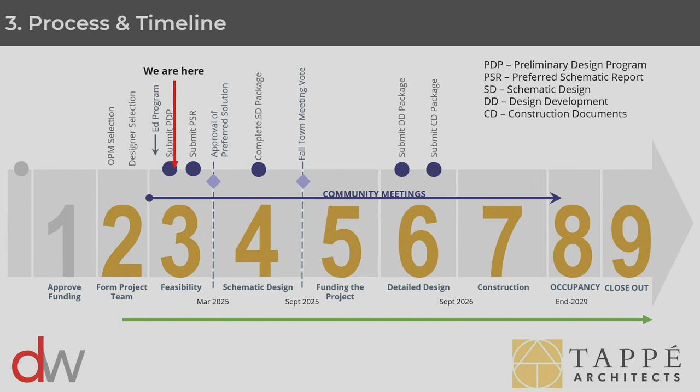And then from there, we came up with 15 distinct options. Some of those options include an outright renovation of this entire space, addition renovations where we get rid of some of the building and add new sections, and outright new buildings. And so that's what we've been doing over the course of the last 8 months.

And then, Chris, if you could just go to the next one. You'll see on this, I'm really focusing on the next 9 months as to what we're doing. You'll see terms up here that if you were watching Fox Hill, we have just completed the preliminary design program. That's how we then narrowed down those 15 options down to 5, which is where we're going to spend, I think, a fair bit of time later in this presentation.

And we've moved into something called the preferred schematic report, where over the course of the next 3 to 4 months, the design team working with ourselves and the school building committee is going to narrow those options down to one preferred schematic, one preferred design. From there, we will develop a schematic design. That will go to estimators, so that we actually have a firm cost as to what that will be.

That ultimately is the tool and the output that we will bring to the school building committee, and then ultimately bring to the town. And we are hopeful that between now and the fall of next year that we can have a package to put to the town so that people can consider that high school solution.

And so that's sort of where we are, and I'm actually going to stop talking for a little bit and introduce you to Chris. We do have a short video that, if you haven't seen, I think is useful in terms of understanding the existing conditions and the educational visioning. And then I'm going to ask a question after we watch the video.

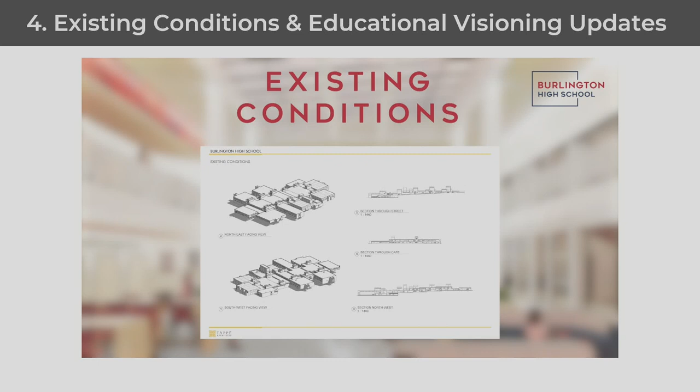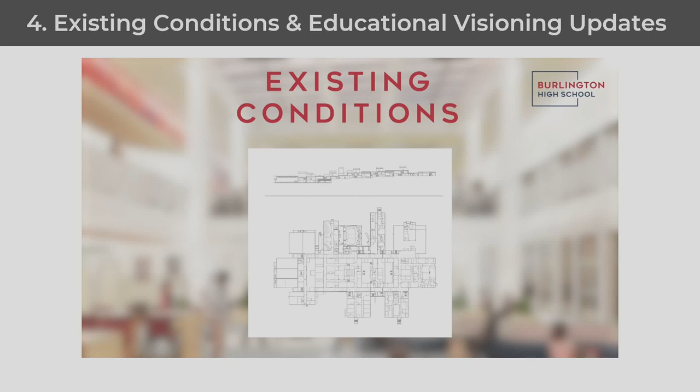Tappé Architects and their consulting team have documented a detailed existing conditions plan of the building. By determining the state of the space and the building elements, it can be determined what is working and what needs to be adjusted or replaced to meet the educational goals, as well as provide a safe and healthy learning environment. Burlington High School was constructed in 1971, 53 years ago.

The cast concrete construction shows expected wear for its age. From a structural standpoint, there are no major deficiencies, but any addition or renovation to the building would need to meet updated structural codes dependent on the determined project scope.

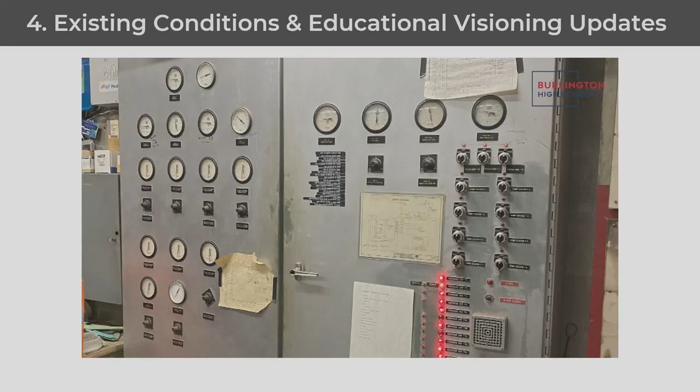The existing electrical system appears to be original to the building and is far past its recommended replacement age. It will need to be fully replaced. Additionally, there are deficiencies with the emergency power and fire alarm systems, which will require replacement. Existing lighting is retrofitted and should also be replaced. The building is not fully sprinklered, and a fire suppression system will need to be installed in combustible areas.

The HVAC system is natural gas, mostly original to the 1971 construction, and is in various states of disrepair. The science classroom exhaust and air systems have failed and are no longer functioning. Controls have degraded over time. They are not maintainable due to unavailable replacement parts. They have many air leaks and have left the building with little to no control in most areas.

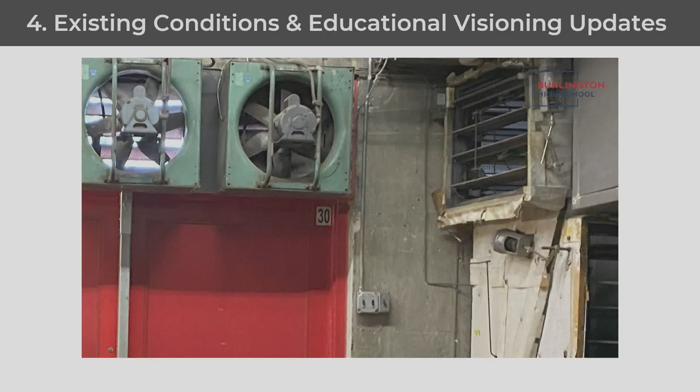The building's plumbing shows several key deficiencies in areas that do not meet modern code requirements. Updating the water system would also improve accessibility and conservation standards.

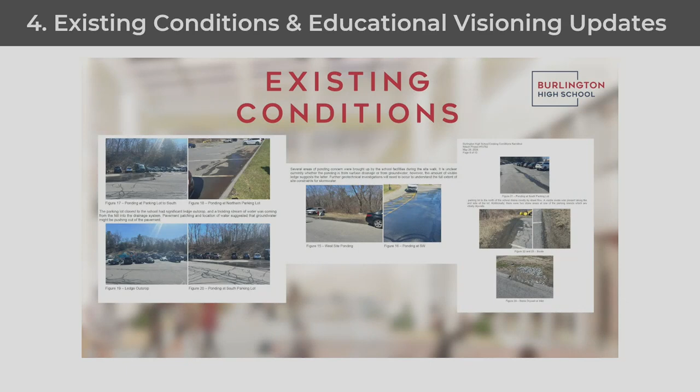Civil engineering has identified several areas of concern. The current stormwater management system does not appear to adequately mitigate large rainfall events. This will require upgrades to meet modern state standards to mitigate and treat stormwater as it flows to adjacent wetlands. For parking and sidewalk considerations, the existing driveway is in poor condition and parking spaces and lanes are oversized, resulting in less parking spots than required.

A building project will need to meet current accessibility requirements for pedestrian routes, including ramps, handrails, and parking. Due to the extreme slope on the site, there are several outdoor areas that are not properly accessible. The fields and stadium are in good condition, however, there are drainage issues on the practice field.

There are several instances of asbestos, lead, PCB, and mercury discovered in the expected areas of a building of this vintage. While they do not pose an immediate threat if undisturbed, any renovation or removal of the materials would require appropriate remediation.

The IT, technology, and security systems of Burlington High School are in various states of adequacy. In general, they are undersized for an expansive building and site like Burlington High School. Any building project would need to incorporate a more robust security and access control plan and delivery, as well as provide technology suitable for 21st century education.

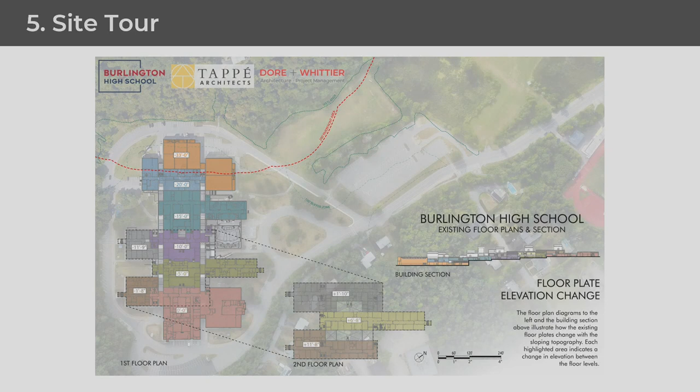When you hear us talk about an off-site building available that we became aware of, it's across Cambridge Street - 10 Corporate Drive. That's the address, but as the crow flies, it's not far from the high school building itself, though it is a building that's vacant. So when we talk about these options, that gives you a little bit of orientation. If anybody's confused along the way, just raise your hand and I'll try to help orient you to where we're at.

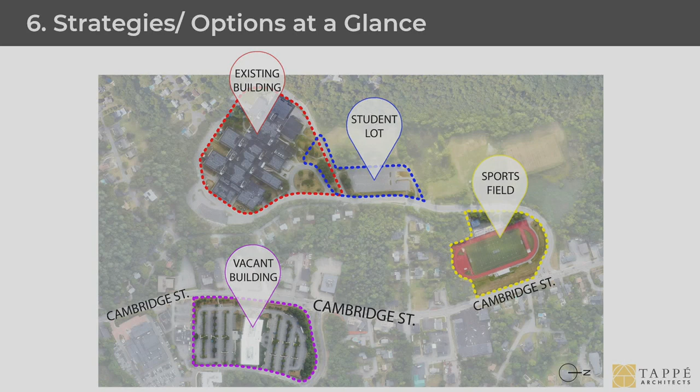So we started the project out by - the building is quite large. It's like 370,000 square feet, and that's a lot of square footage. The program we are building to is 1,100 students, which if you translate that out in the space summary results in around 222,000 square feet needed for just a high school program.

So the building is oversized, and you know that because you already have non-high school education spaces in this building right now. So you'll hear us reference those sometimes in these options - things like BCAT and the lab initiatives, Cambridge Street Closet, the preschool program, central administration. All of that stuff's in this building, co-located with the high school, and that's what makes up the rest of the square footage.

But the building's large, and instead of diving right into bricks and mortar, or architecture so to speak, and program, we wanted to think about the building in terms of strategies. Because we had this building with 8 first floors, 3 second floors, and really, how do you break that down and understand it from a kit of parts - what you can take apart at each step to get to a result that you needed. And so we developed these strategies.

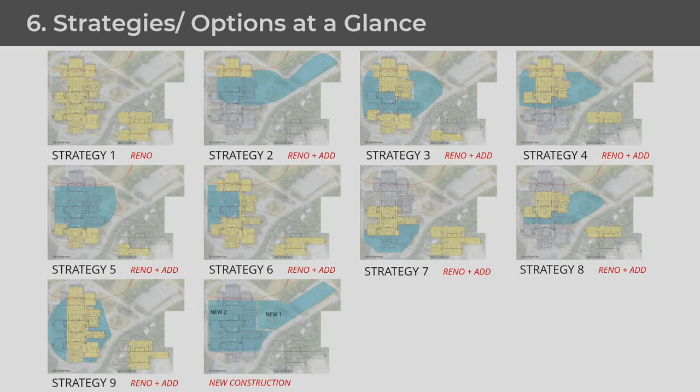The stability factor, this space was built on wetlands, is that correct? There are a lot of wetlands, but you're on ledge as well. So most of this building actually is probably supported on ledge. And you can blast down on this ledge, sure, and not cause any trouble to the homes surrounding the space? No. And it may not be blasting, it may be chipping. There's all kinds of construction methods. Usually when we have a project that's intensive on that kind of work, it's embedded in the contractor's scope, like they'll do surveys around buildings that are really close by with video inspection and stuff, so that if some vibration of the earth does cause cracks in their house, we have a before and an after so we can know what caused what. But contractors don't want that to happen, so they take all the management risks to avoid it.

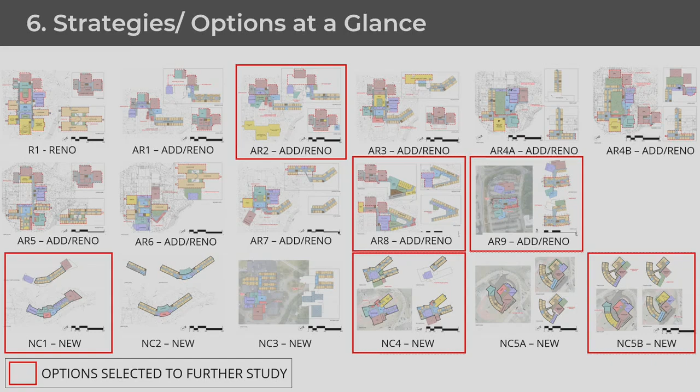I'll talk to you quickly about those relative to the orientation site plan I showed you before, where everybody's got that little loop road going around the existing school to orient you. These site plans identify things in a way that's a bit easier to look at than the program elements shown in the options before. They're kind of a thumbnail view, zoomed out. You don't really get what the program is inside, but it helps you understand what's happening with this option, and then we dive into the specifics as it goes forward.

AR2 is a project looking at an addition going basically into the drop-off circle right now. The strategy is you can build classrooms first, then move the kids into them, and then start to take down other parts. So it creates swing space that's actually permanent, which is a good goal to have, because you can spend millions of dollars on portable temporary school facilities that just get shipped away at the end of the project. So one strategy is to build the new stuff and let that be your swing space, allowing you to move around in phases.

Sorry? Yeah, we would revise the drop-off spot, you can see in AR2. We don't have a laser pointer, do we? No. I think I could do it here.

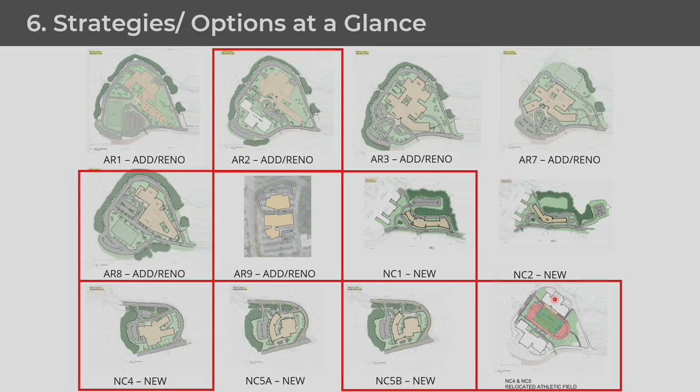Yeah, so essentially where you're sitting now would be torn down, and that's where the football stadium would be rebuilt.

So diving a little bit deeper into option AR2, this is the site plan. The white part at the lower left - everybody's with me, right? This is the loop road. You understand the high school layout. The left white part is the cafeteria here, and then central admin is here with the second story. Currently, you're sitting around in this spot right here, as the auditorium, and then the gyms and everything are down on this spot.

And so the way that this project works, you can see there's the locus plan there. The way that this option works is everything that's up here in this section would be existing to remain. That means just renovation, and then down here is the non-high school education program that we would also renovate as part of the building. But what's in the middle of the two, we would tear down. But you wouldn't tear that down until you get to build this section, which is a new academic wing that allows you to move the kids over and then take down what's in the middle.

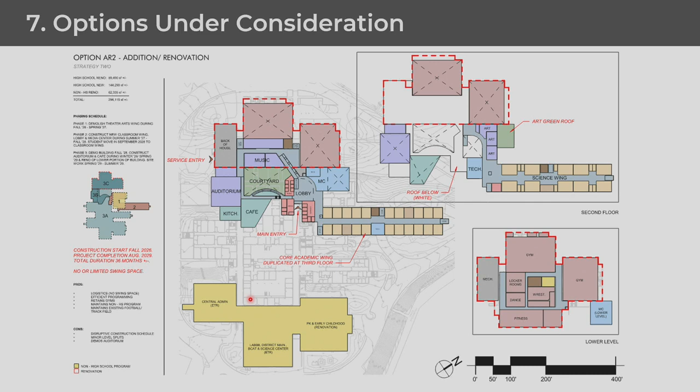So here's option AR8. I did want to bring up too, any part of the buildings that would be left behind that we would renovate will be brought up to code. That was a question that people were asking in our meetings. So again, anything that we leave as a structure will be brought up to code.

Thank you. So AR8 is, again, on the site. Let me just go to the next page and we'll come back to this. So again, keeping, in this plan, similar to the last one, we're keeping the end of the building that has the gyms and fitness centers, and then also trying to keep the auditorium and drama, so this space right here and the spaces right behind it.

And you know, we can try that. That's a little bit different than the other option. I'm sorry, I shouldn't have clicked that. But the difference between these two are really in how we deal with the academic wing on the right, and it's a bit more pushed into the new build, which is in this zone here.

This is actually 3 stories tall, is that right? Okay, 4 technically, because you've got this lower side here, and then this side is from the main entry road here. It would look like 3 stories on this side and then the 4th story over here.

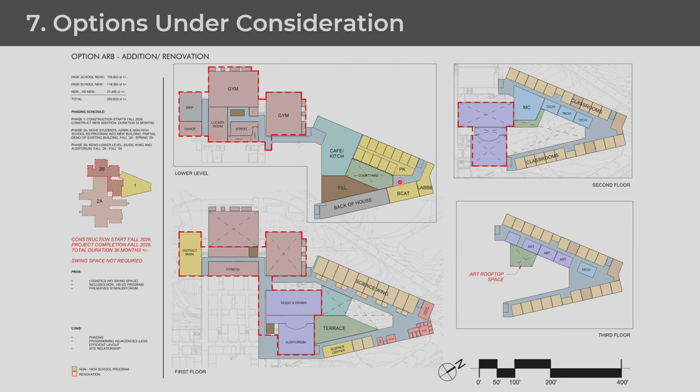So you're planning to keep all of the existing non-high school programs? Maybe, okay, that was my question, whether you're going to keep all of them, like BCAT and everything else, if it's possible. Maybe. I think they need to go somewhere, that's correct, and I think in one of the upcoming building committee meetings, this is going to be taken up as to what exactly needs to stay with the high school and what doesn't.

The tricky bit here, typically with MSBA projects, we like to level every single project with the exact same square footage, and then you can compare apples to apples easily. Some of these add-reno projects where you don't have to take down as much, but you want to build more, say, academic spaces, create different opportunities in different ways. That's why we're analyzing strategies and options, because some of the benefits of one option versus the other is you can get more non-high school program in it versus the other.

So we've tried to bring out and say this one has an allowance for non-high school space in the 21,000 square foot range. That doesn't get it all in, and so whatever's not there would have to be taken up. For example, we're not showing some components here. I don't know what's in, what's out. I don't want to make that claim right now because we haven't done it with the building committee, but we're showing space, and we're going to try to tackle that in an upcoming building committee because that really needs to be sorted out so that we can finalize the space summary and get you to how big the building is.

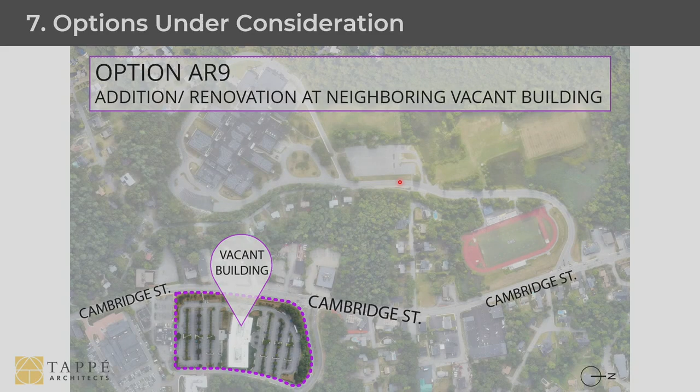We've visited it twice, looked at it, got CAD plans. This option shows you, remember earlier I mentioned that the high school space summary to accommodate 1,100 students, based on enrollment trends and projections, produces about 222,000 square feet of space.

This building is about 110,000 square feet on 3 floors, and that's the red area right here in the middle. So if we took that building, we would basically need to double it by adding a sister building on the side.

So that means half your building's already built for you and you just need to do interior fit out, and the other half would be new, probably the larger program spaces like auditorium or gym or things to support the education program.

But this would be a complete high school program, dedicated and isolated by itself. No non-high school education programs go with it unless the committee decides to push that into this kind of project in an upcoming building committee meeting.

But this is kind of an option to look at and how that might work. On the right, you can see some of the initial space summary or space planning diagrams using all 3 floors and making an addition there. Still very preliminary, but it has a lot of promise and reutilizes some already existing assets within the town.

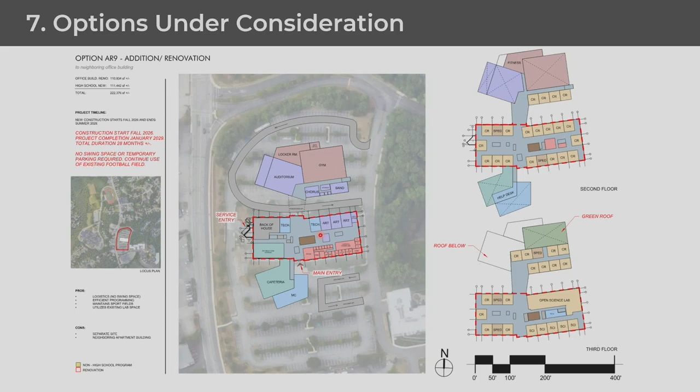This is obviously looking at, there's not very many 220,000 square foot open spaces for us. This happens to be half of that we are looking at, and again, there may be others too. We're just trying to be as creative as possible. This does not address the current building you're in or some of the other deficiencies that currently exist.

So with this being available, the town doesn't own it though. So we'd be acquiring commercial property, which would mean not only the cost to acquire it, but then do we know what impact that would have on possible tax implications, no longer having that viable for a business or businesses to come in?

Again, that would all be studied, so we'd have to have all those numbers together, and that would be part of the package, but both of those questions were brought up and already considered. The building is vacant now, so I'm not sure it's generating as much tax revenue as it could be, and also people's work lives have changed in terms of going into work or not.

So again, we're just trying to cover every option because we were predicting someone would ask why haven't you considered one of the buildings that exist in town already? So we are certainly doing that, looking at the build-out cost, the purchase or even potentially lease cost, and the revenue impact of those buildings moving forward. So we thought the town would appreciate an option included in what we are studying.

The next option is a new option, and if you look at the diagram on the right, it's putting a building in the student lot. It's an unconventional shape, I would say, for a school building.

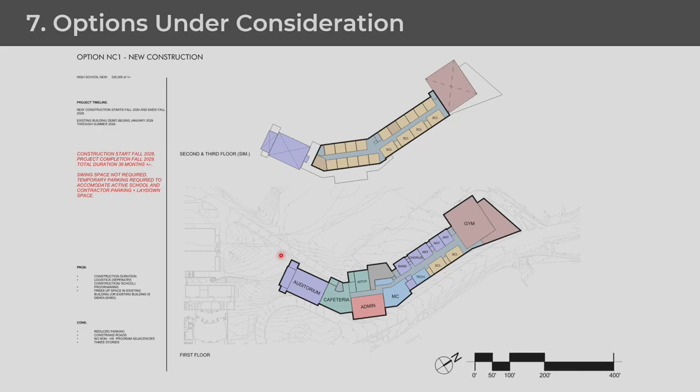And how would you route the traffic coming in off of the highway on that? So we see it as traffic coming, and these are kind of initial ideas too, right? So we can see traffic probably coming in this way and then looping around and back out for drop-offs.

Probably buses would come in and go around the back just so they're separated, and then you might have a teacher lot up here or a staff lot, and then you would still have the lots that are back in this area, and we would probably need to think about some more parking somewhere. Maybe it's structured. We don't have all the answers figured out yet because it's early, but these are the things we're going to have to figure out during PSR.

And again, at any point in time as we study these options, the building committee may be like, that's a non-starter, we can't go past that line, so this one will just come off the table or something. So this one's got some work to do to make it to the end.

So again, benefit to this though is no swing space is needed, no modulars are needed because it's new construction. And there's no parking. Kids will take the bus. So there you go, no parking for a while.

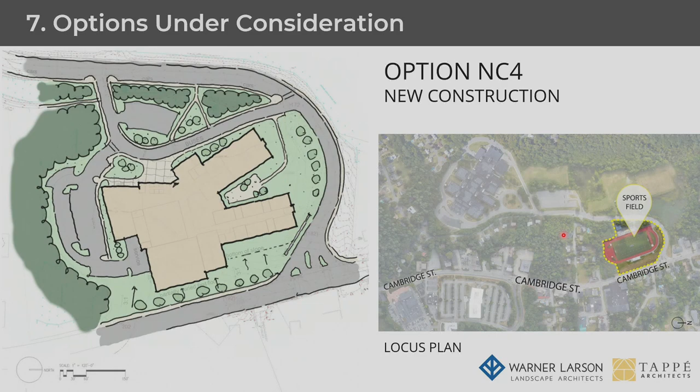That's the floor layout. Okay, so NC4 and NC5, I'm going to group those together because I don't want to get too bogged down on the differences between the two, because they really are kind of an expression one and the same. The idea we're going after here is building a building on the current varsity field. So we've come up with two different options, two different building expressions that could fit in that zone.

This is NC4, and one of the ideas here is that we could create some community relationship to Cambridge Street, because you can build down low, and then as the building rises, you can connect up to the curb line and fill in the fabric there to create a presence, because this building would be 4 stories tall just to fit on this side.

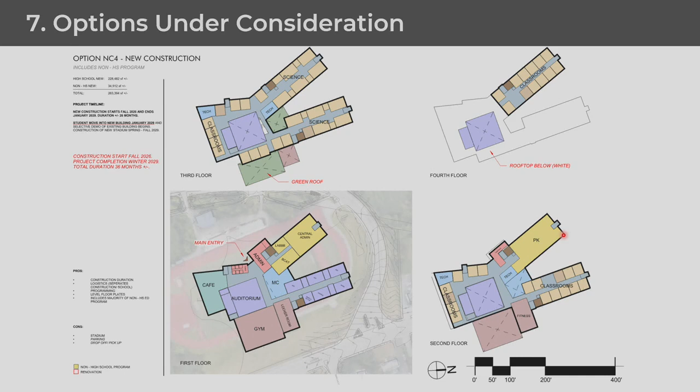This one's got optimal solar orientation, which means you can get a better sustainability reaction to it, like the passive stuff you want to put in modern buildings now. This option is just a different shape and different kind of thinking around it, but both options are viable, so we're looking at these as a strategy. It shows up as 2 options when we say there's 5, but really the building committee is going to say which one do we like the best.

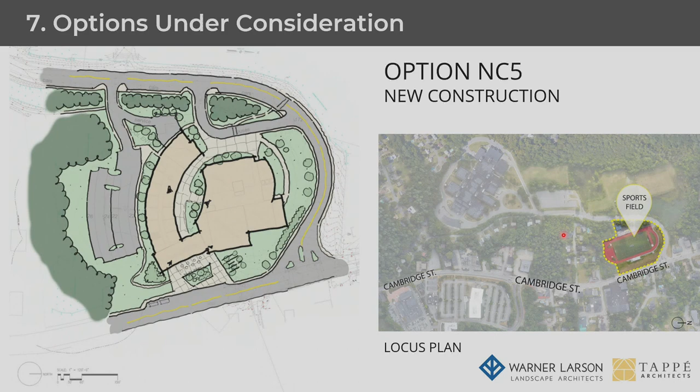So then naturally everybody's question is, what do we do with the field once we take it offline? A similar question we have with a few of these options is, what do we do with this building if we build something new or go across the street or anything like that? We don't want to just leave a 300,000 square foot building empty with the town to deal with, or mothball, or whatever you would say.

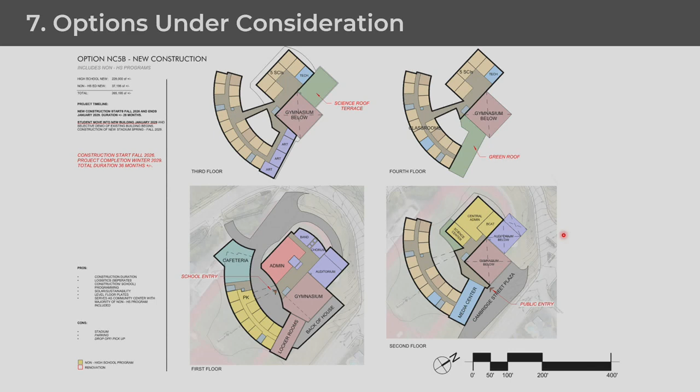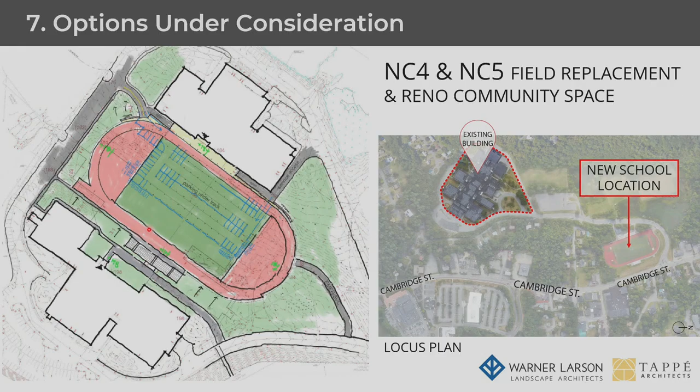In doing this exercise, we had this idea that said, well, what if we went back to some of the strategies and took out the middle of the building, which is actually the most problematic part for getting from the top to the bottom, and we put a new stadium between the upper right-hand side here, which is all of your field house components. You come out of that level and it's a playing field, and then you can go up. I'll just go to the next slide here.

This is the existing gyms and playing fields, so that's down in this section, and then you come out across as a sports field. You can see the background is that would all be demolished. And then you kind of come up the hill a little bit, and it's another flat plaza zone that leads to the non-high school education spaces like district admin and things like that. So it creates this really interesting facility that kind of ties everything together nice and neatly, and also gives you a new high school.

So it emerged as an idea. We're showing that because of the way this works, and there's a level underneath, you actually can get more parking below the field as you sort of level the field out and create structure there. So it has a lot of benefits to it, and it's not simple, but it's an interesting way to deal with the complexities of the site in a way that addresses the high school program.

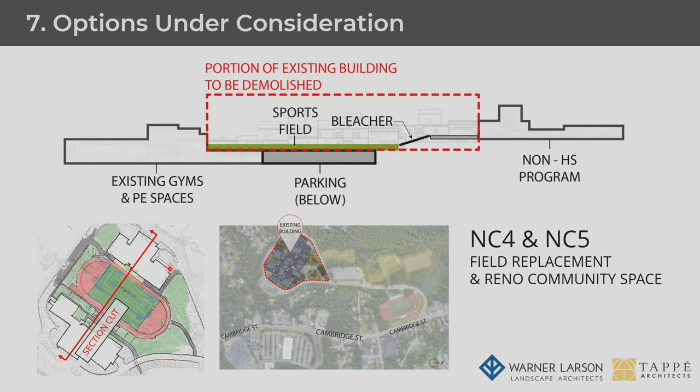With that, those are the options. I'm going to flip back to the front page here on the at a glance so that you can see where we're at with the 5. Again, it's the AR2, which is the addition straight off to the side, the AR8, which is the triangle addition, the one across the street, the one on the student parking lot, the 2 on the field, and then the field modification to this building goes with the 2 on the field.

So I think with that, I've kind of talked you through some of the options. There's a lot more in-depth conversation recorded on these with the building committee conversations. But if there's any other questions related to the options, we can entertain those for a minute.

So you're looking to narrow down to one choice in March of 25, which is about 4 months from now. Do you have cost information that you can show us on that? And if not, how is it that you're narrowing down already without that information? Yeah, part of the PDP, we had cost information. We didn't bring that tonight. I could pull that up if it's helpful. Yeah, I think that's pretty fundamental to understanding which of these makes sense.

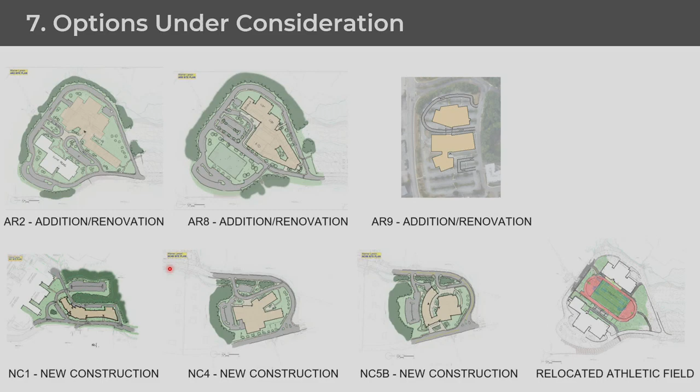Yes, that information is available, and it is on the website, and I know what one of the folks was looking for, so that will be in the SBC meeting pack that we did last week. That is on the website, but Chris will pull that up here, and it will give you ranges of costs that we do. So what happens is all of those options have a square footage associated with them. That's what drives the costs, and so it goes to an estimator.

The estimators are working on all high school projects, middle school projects throughout the Commonwealth, so they have a really good handle on what dollar per square foot space costs, and then they account for site work and a whole host of other elements.

That comes up to a number, and then what we do at this stage is we provide a plus or minus of 10%, just to say this is the range of where this option likely is going to fall, and hopefully we can get that pulled up here.

I think that will provide some color. I can tell you just from looking at it, the renovation of this entire building, R1, will be the most expensive option to perform. It will also, in my opinion, having done this at a separate school, cause the most amount of disruption to the children, the students, the parents, the teachers, the administrations, because effectively what you do is you take one section of the building and you renovate it, and you start hopscotching the kids around because you don't have swing space.